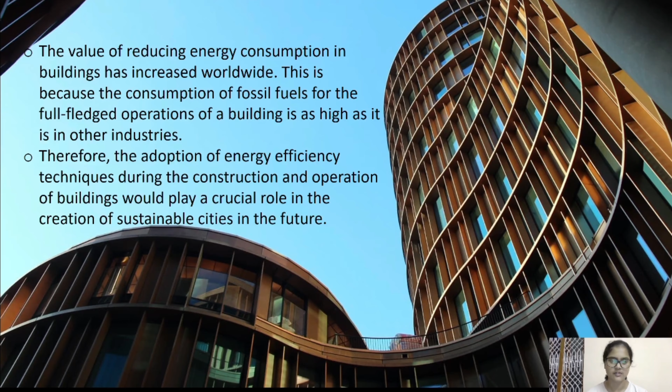Energy efficiency is the use of less energy in a building to perform the same operation as buildings that consume energy inefficiently. It should be considered during the design stage, selection of construction materials, construction process, and operations of the building. Adopting passive solar house design strategies at the design stage is the first step toward an energy efficient structure.

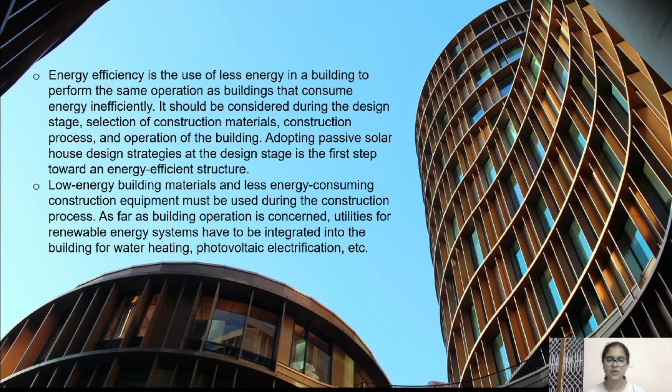Low energy building materials and less energy consuming construction equipment must be used during the construction process. As far as building operation is concerned, utilities for renewable energy systems have to be integrated into the building for water heating, photovoltaic electrification, etc.

Why is energy efficiency in a building important? It's because efficient energy consumption in buildings is one of the most affordable ways to lessen the detrimental effects of climate change and health related problems.

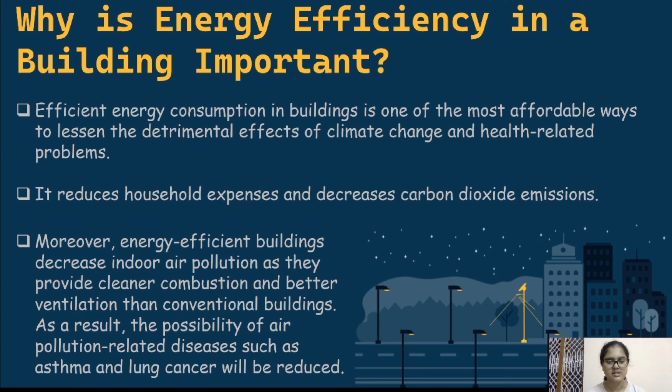It reduces household expenses and decreases carbon dioxide emissions. Moreover, energy efficient buildings decrease indoor air pollution as they provide cleaner combustion and better ventilation than conventional buildings. As a result, the possibility of air pollution related diseases such as asthma and lung cancer can be reduced.

How do energy efficient buildings help the environment? The efficient use of energy in buildings is one of the most affordable ways to lessen the detrimental effects of climate change, health problems, unemployment, and poverty. It reduces household expenses, infrastructure costs, and reduces CO2 emissions.

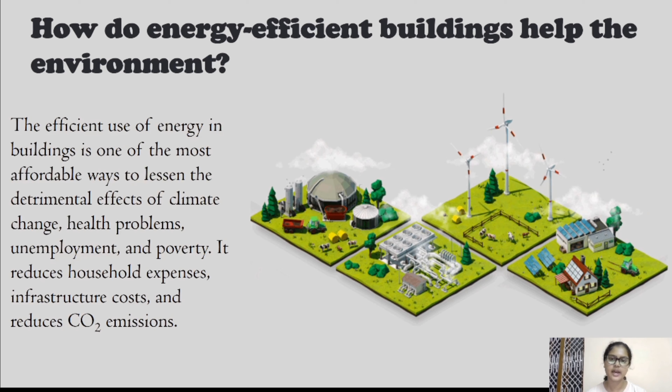How do energy efficient buildings influence cities? The value of reducing energy consumption in buildings has increased worldwide. This is because buildings' operational energy has become the third largest consumer of fossil energy after industry and agriculture.

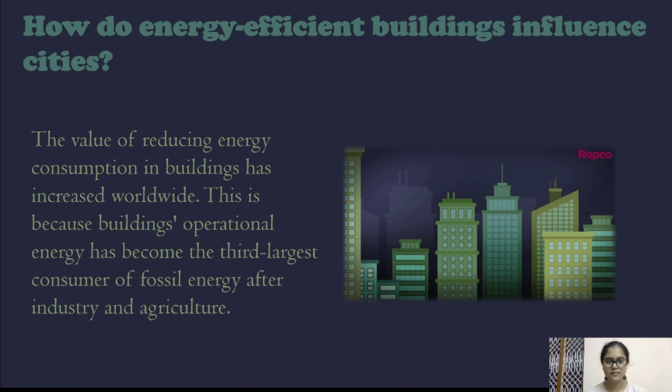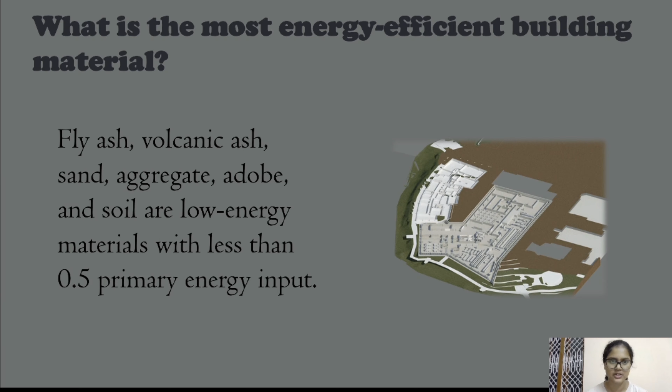What is the most energy efficient building material? Materials like fly ash, volcanic ash, sand, aggregate, adobe, and soil are low energy materials with less than 0.5 primary energy input, and this makes them more energy efficient building materials.

Now, let us go through the steps to be followed to create energy efficient buildings.

First, nearly zero energy passive building design. The design of a nearly zero energy passive building involves adopting all solar passive strategies at the design stage before actual construction begins, like passive solar heating or cooling, building daylighting, and provision for rainwater harvesting. The design of passive building requires knowledge of solar geometry, local climate, and window technology.

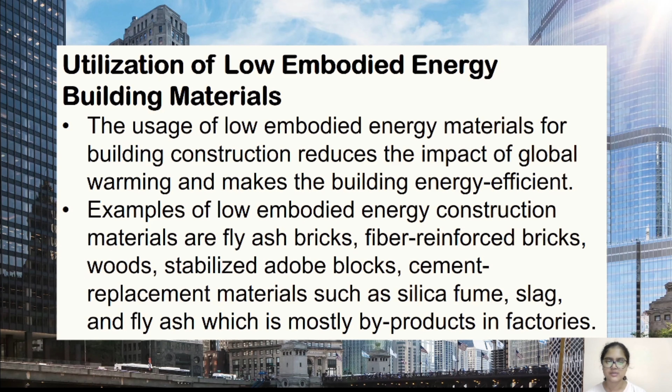Step 2, utilization of low embodied energy building materials. The usage of low embodied energy materials for building construction reduces the impact of global warming and makes the building energy efficient. Examples of low embodied energy construction materials are fly ash bricks, fiber reinforced bricks, woods, stabilized adobe blocks, cement replacement materials such as silica fume, slag, and fly ash, which is mostly byproducts in factories.

Third step, usage of energy efficient equipment. This involves using energy efficient equipment in a building that requires the lowest possible energy, such as LED lights, fans, air conditioners, and refrigerators. Energy Star approved fluorescent bulbs are highly desirable because they are more durable and their maintenance cost is 75% less than conventional bulbs.

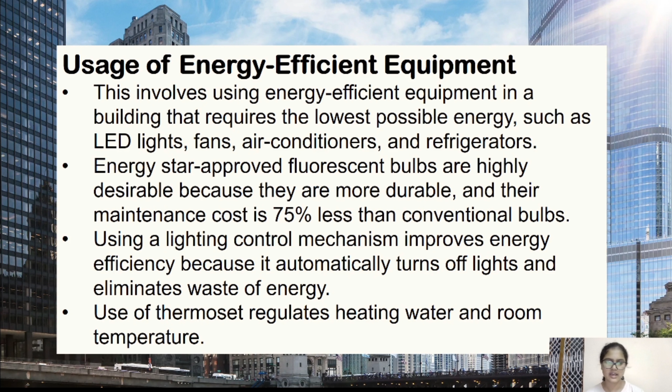Using a lighting control mechanism improves energy efficiency because it automatically turns off lights and eliminates waste of energy. Use of thermostats regulates heating, water, and room temperature.

Fourth step, integration of renewable energy technologies in different applications. Integrating renewable energy technologies in the building is another way to reduce energy consumption and reduce carbon footprint. Solar water heaters, small wind turbines to generate electricity, solar photovoltaic electricity generation are examples of renewable energy technologies installed in a building to reduce operational energy consumption.

Other renewable energy sources like hydroelectricity, biomass, and biofuels can also be used. Roofs and facades of buildings are suitable for the placement of solar thermal collectors and photovoltaic panels.